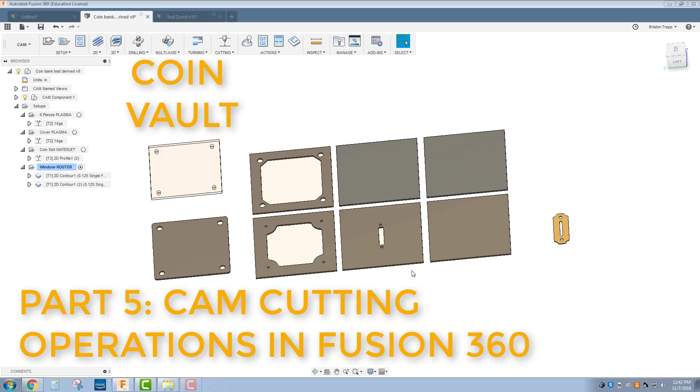This is the CAM overview for the coin vault pieces. You're going to have a setup that's going to cut out these 6 pieces all at once. A second setup to cut out the bottom cover on a separate sheet to kind of maximize our material usage. A setup for the brass waterjet coin slot.

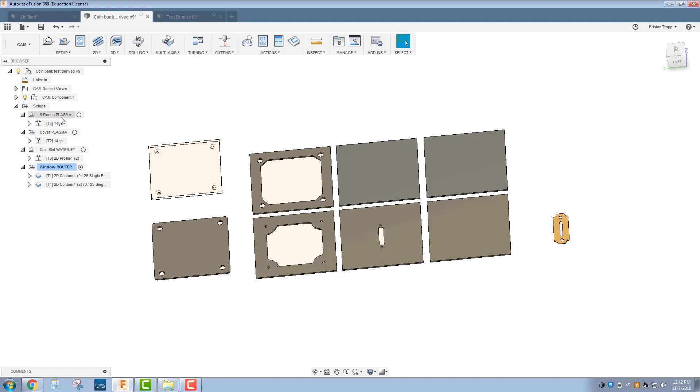And the final one, this is still not quite determined whether this window will be CNC cut on the router out of Lexan or it will be laser cut out of acrylic. So the setup for these 6 pieces, you're going to have your work coordinate system at the back left top corner right here.

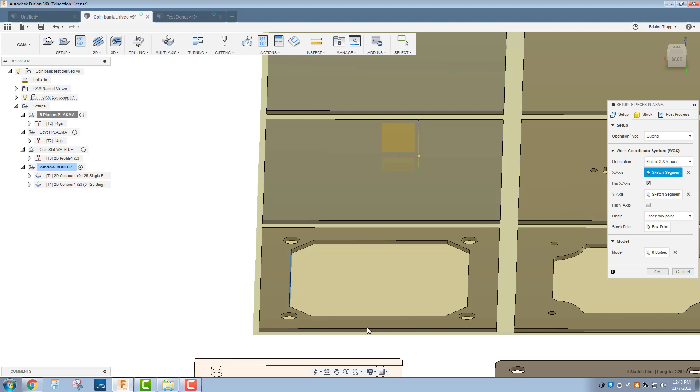To change from our standard corner, simply just change the bubble, and then let's say if your X and Y are in the wrong direction, you can just go over here and select X and Y axis. So now X axis, let's say it will be this one, and then Y axis will be this one. So this will be the opposite of what we need to do. So my X and Y axis are pointing the wrong direction for what we want to do.

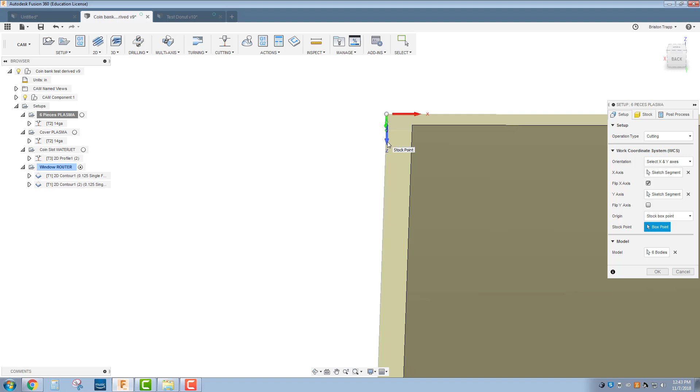So we're going to go back and make our X axis this segment, Y axis is going to follow this segment, and then our box point's going to be at the top. And notice it's upside down, so I'm going to click on the tip of the arrow and flip it, and then pick that point up again. And now we have our X to the right, Y backwards, Z up, and that's that for the setup tab.

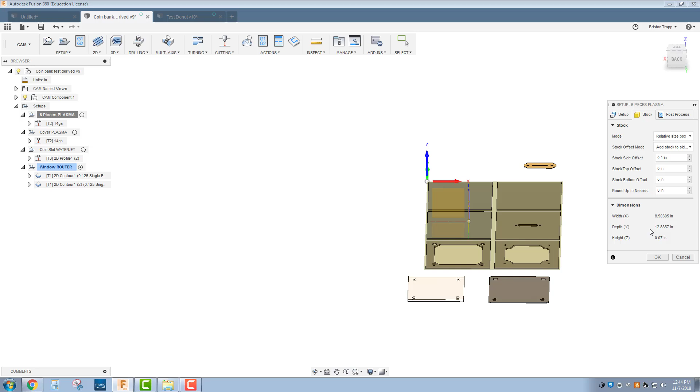Operation type is under cutting. Make sure you select your 6 bodies. You need to actually click on these 6 pieces because we're not cutting out all of these, just these 6 right now. Stock is going to be relative size box with 0.1 on the side offset and 0 on the top. So basically we need an 8.5 by 12.8 X and Y dimension piece of sheet metal, and we're cutting this out of a 48-inch by 48-inch sheet.

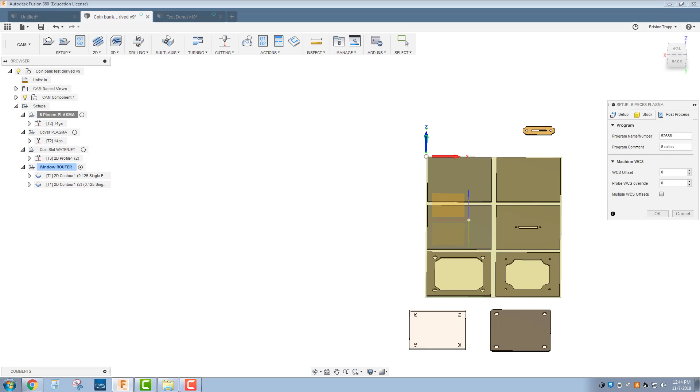Post process, you can do a comment here. This is going to be program. I'm just going to go 5/26/86 for my birthday. And then the program comment will be 6 sides. Leave that at 0. Click OK.

Your tool path, you're going to use the cutting operation. You can copy and paste from a previous plasma cut file or use the template that you've created. But basically you're going to use the built-in .04 plasma cutter that is found in the samples profile under inches. In the sample tool library, this .04 plasma cutter.

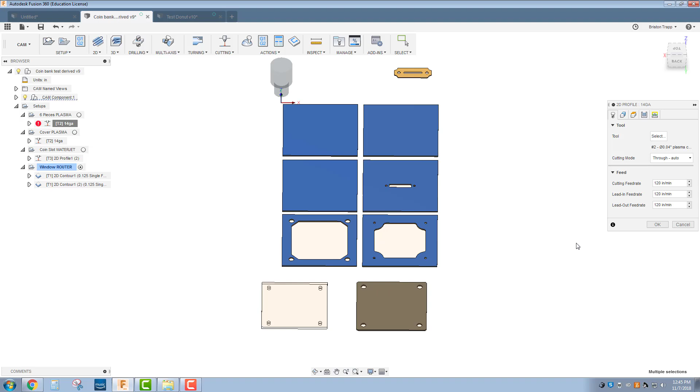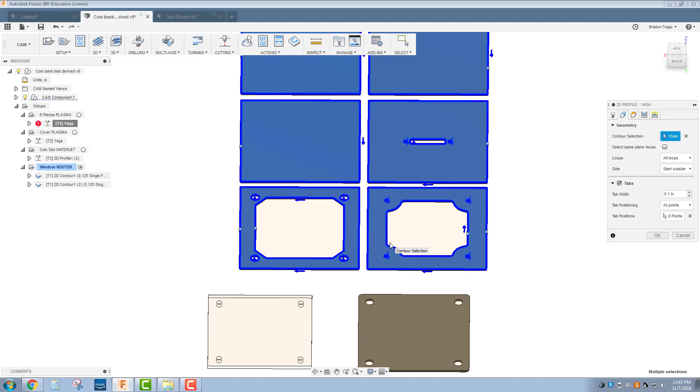Cutting mode is going to be through on auto, and we're going to be cutting at 120 inches a minute for the lead in cutting feed rate and lead out for the 14 gauge steel. Geometry, you're going to select your 6 surfaces. Tabs, we're going to have a 0.1 inch tab at 8 points. So basically 1 tab here, here, here, here, here, here, holding our pieces into our main sheet. And also a tab here and here to hold our inside drops. No tabs on the smaller cutouts.

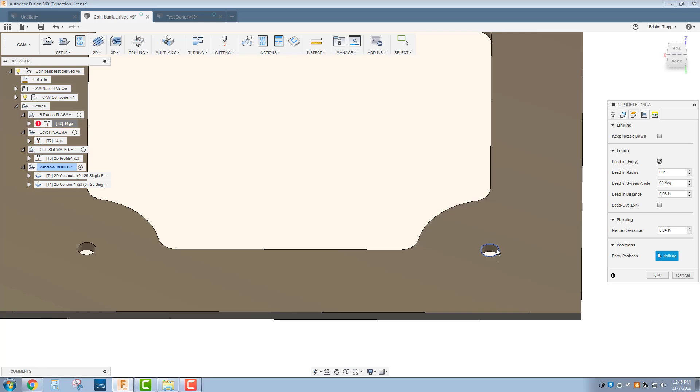Heights tab, nothing here to change. Passes, make sure your compensation type is in computer. Linking, gonna have a 90-degree sweep in angle, a lead in distance of 0.05. We need a really small lead in so we can get a tool path inside of that small hole for the rivet, and then a pierce clearance of 0.04.

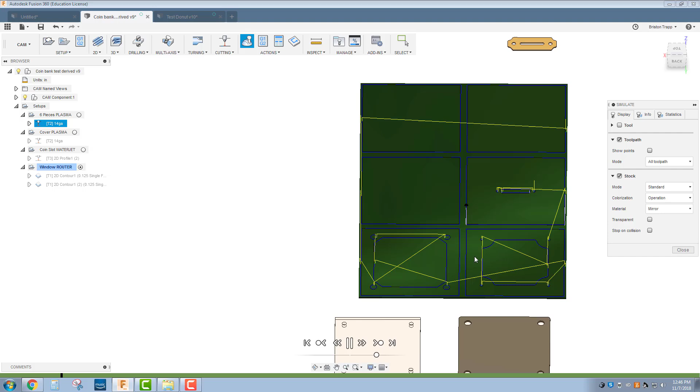The simulation for this should look like this. We're just going to cut the inside geometries first. And then the outside. So this will be post-processed with the Techno CNC Plasma Post Processor as a single file, and you'll cut that on one sheet.

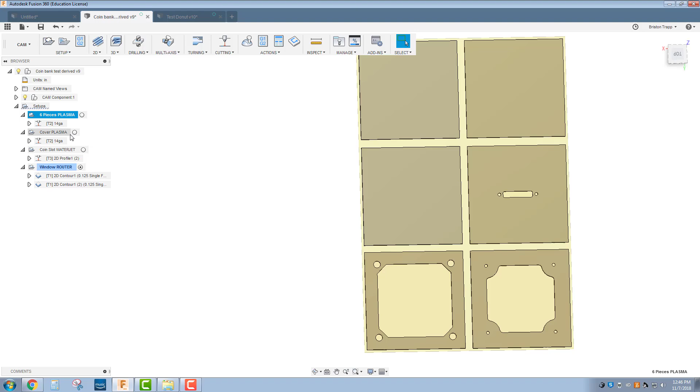The cover is basically going to have identical feeds and speeds and properties as the 6 pieces. We're just cutting this out as a separate piece out of a different piece of sheet metal.

So the setup is going to be pretty much similar. We're going to put it in this corner. You can also put it in this corner. Really just whatever corner works the best for this sheet that's being cut. Sometimes as they get cut and cut, you want to make sure you actually kind of predetermine where you're going to put that work coordinate system for your origin selection out on the table.

So we're going to use this corner right here, and then basically same thing, 0.1 on the side, post-process. So this will be, I'm going to call this 526862. And this will be the cover. Click OK.

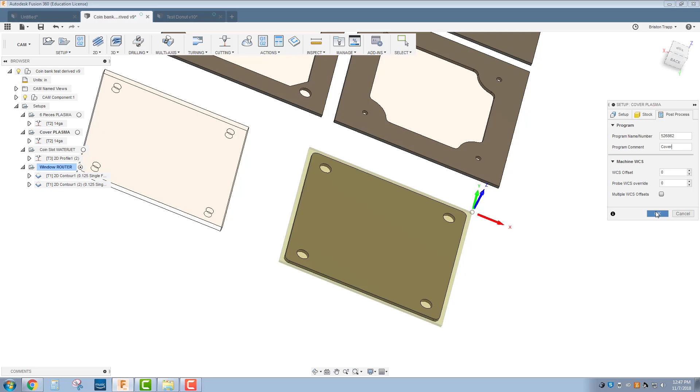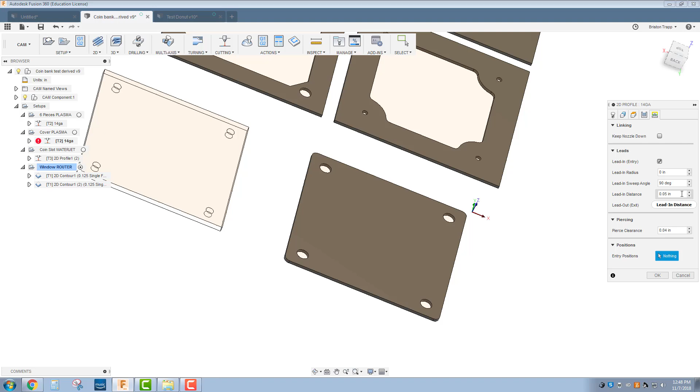Still using that default 0.04 plasma cutter in the samples library at 120 inches a minute. One tab on the outside. Nothing on the heights, passes, compensation type in computer. Linking the same as before, 90 degrees, 0.05 lead-in distance. Right there.

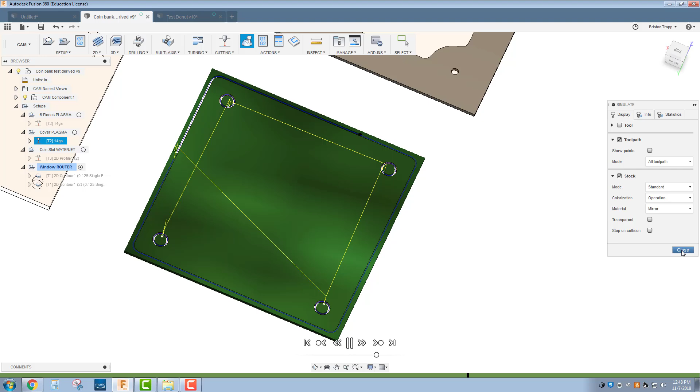So that's the programming for the last steel piece. Here's a simulation cutting out the holes for the bolts and finishing with the outside profile. Pretty straightforward there.

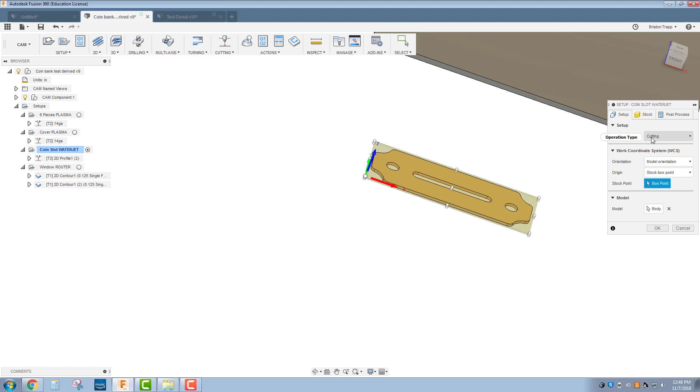The waterjet part, the coin slot, that setup, let me spin this around. Cutting our stock box point is going to be on the bottom left corner, kind of the standard corner for most of our cutting operations. The stock is going to have a side offset of 0.04.

We can be a little more accurate with our water jet, so we need a stock that's 2.08 by 0.83. Post process 1001 is fine. I'm going to do something a little more unique, because if everybody does 1001, it might be a little difficult finding your file. Coin slot.

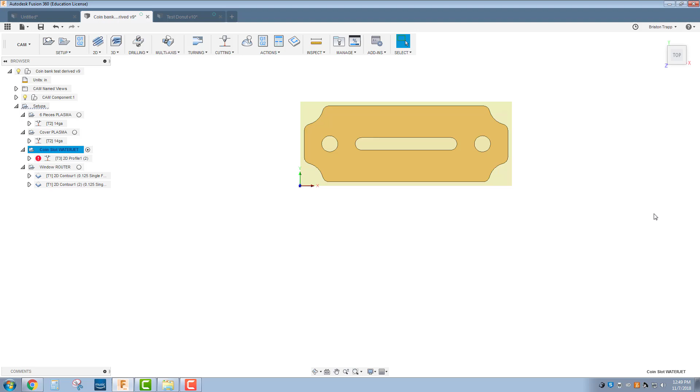So that's the setup, and then the cutting operation for the water jet is very similar to the plasma cutter. For the tool, you're going to browse and go into the samples profile water jet, this 0.021. Our water jet kerf width is actually 0.027 to 0.03. But since we're going to do compensation type on the controller, this value right here really doesn't matter that much.

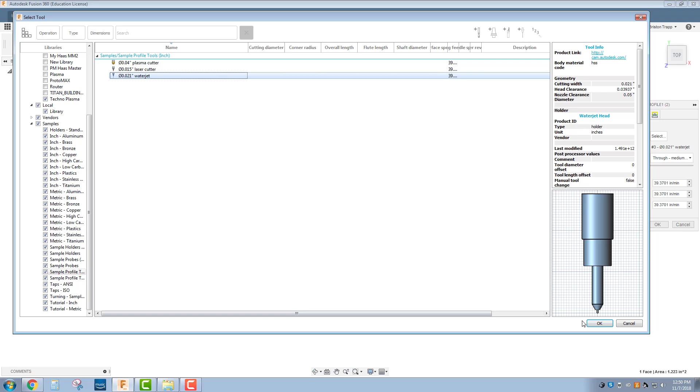For the water jet, we use quality, not necessarily feeds and speeds for the cutting rates. We're going to do medium quality. So these numbers right here aren't even relevant. The settings for medium are going to determine the speeds for the cutting of that thickness of material. Geometry, we're going to put this section, that's going to be our selection for our chains.

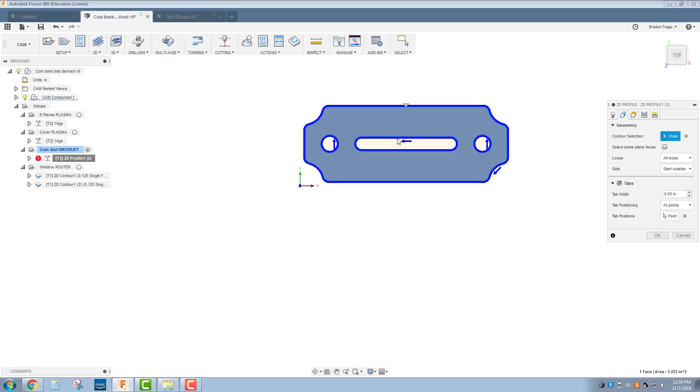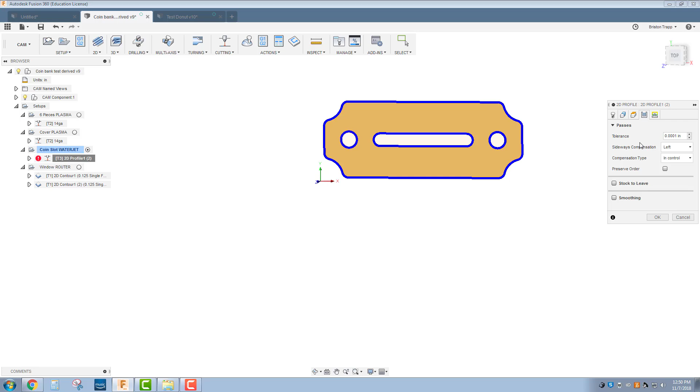Tabs, we're going to have one small tab, 0.05 inches in width, at one point. This will keep our part from dropping into the abyss of the water tank and the water jet. Nothing on the heights tab to change. The default values there are just fine. Passes, this number's fine. Left, make sure this is in control. This is where it takes the actual diameter of the water jet nozzle that's set on the control, not what's programmed in Fusion.

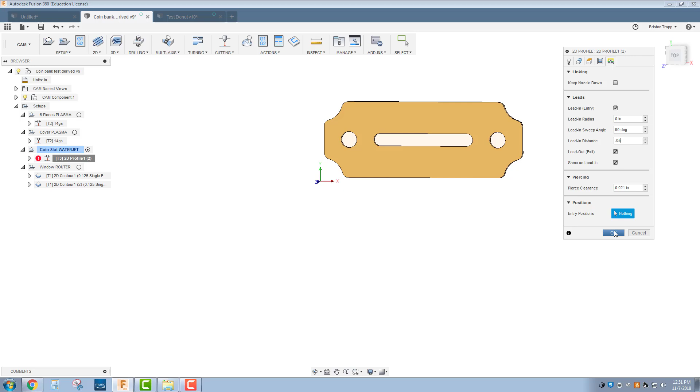Linking on here, we're going to have a 90-degree sweep angle for the lead-in. The lead-in distance 0.035. Actually, I'm going to bump that up a little bit more. We usually want that to be bigger than our water jet diameter, so we're going to go 0.05 on that. Pierce clearance, same thing, 0.05. Let's see if we get tool path. Tool path on our small holes, tool path on our slot, and then on our outside.

One thing I possibly didn't spend some time looking at on the plasma cut parts on the linking, we don't need a lead out. I don't know if you caught that, but we don't need a lead out. We just need a lead in. On the water jet, we'll have a lead in and a lead out. We can probably get by without a lead out, but we're only cutting one part. And it is nicer on bigger parts to have a lead out, I think. I don't know.

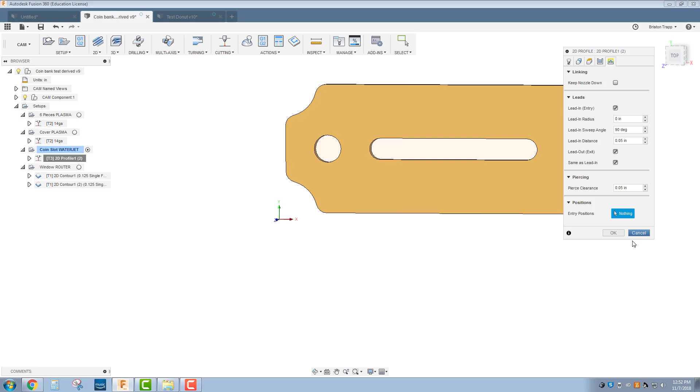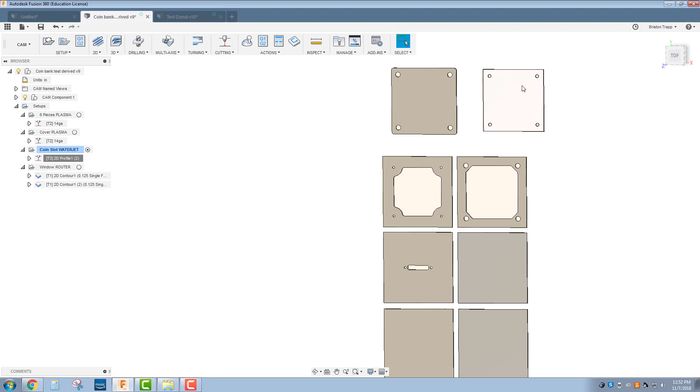Cancel. So that's the CAM operations for the 14 gauge hot rolled steel. So the 6 pieces and the cover, and then the coin slot. This acrylic is to be determined. That will be in a separate video, whether that's going to be laser cut acrylic or CNC router cut Lexan polycarbonate. Thank you. Goodbye.